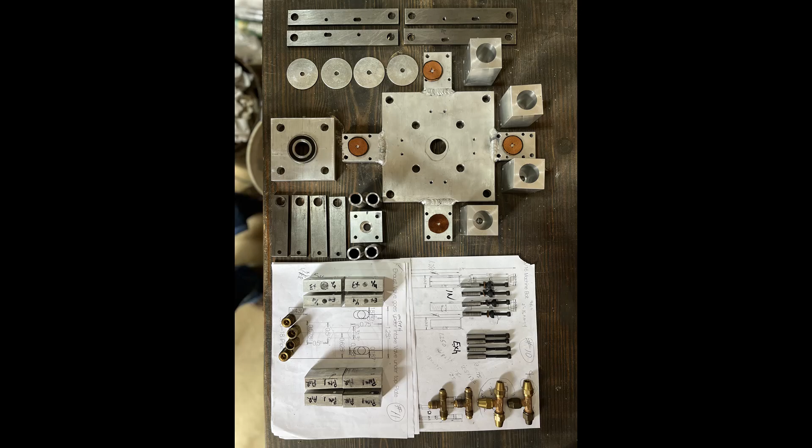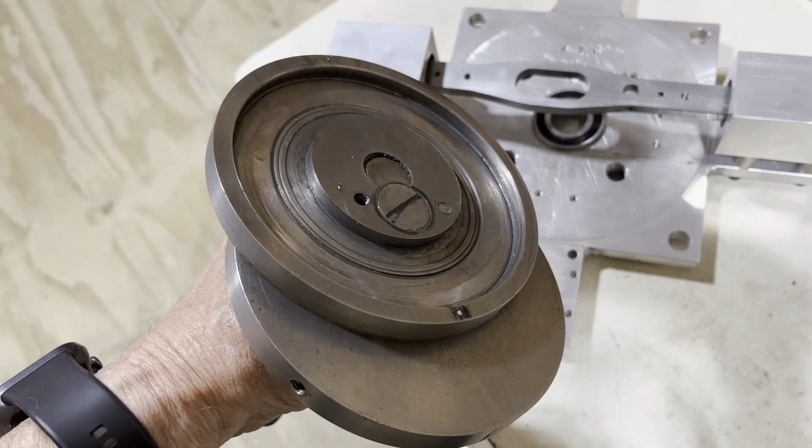The piston rod will slide in and out without any problem, and that seems to be very good. So I will need to put my eccentric in and check for the bearing ride that goes in the groove to make sure it works okay, and also that the drive shaft, when it's center drilled and the bearing goes in, lines up over the top of the hole and goes back and forth properly.

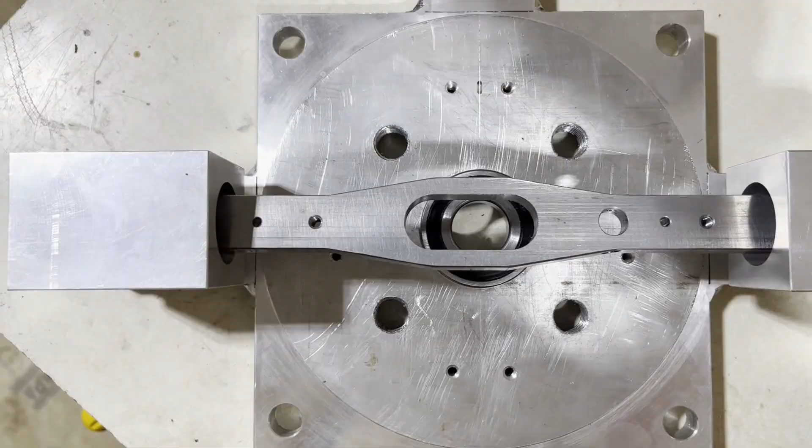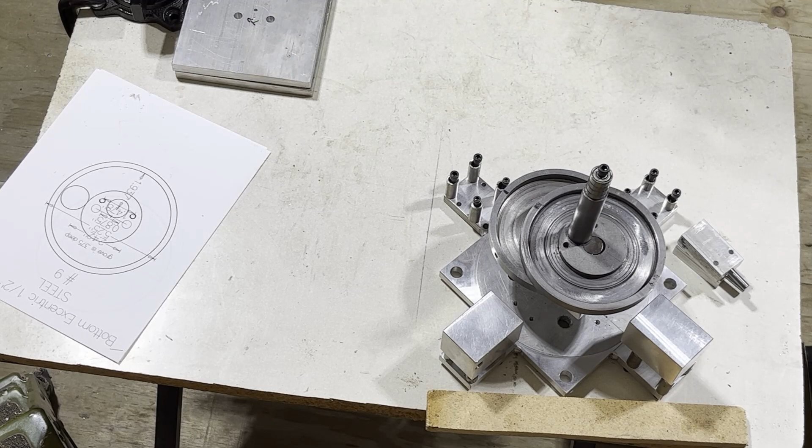What I'm doing is building a compressed air motor that can be put in a vehicle and used instead of a gasoline or diesel motor. I have most of the parts made. I've been working on it for a while, and yesterday...

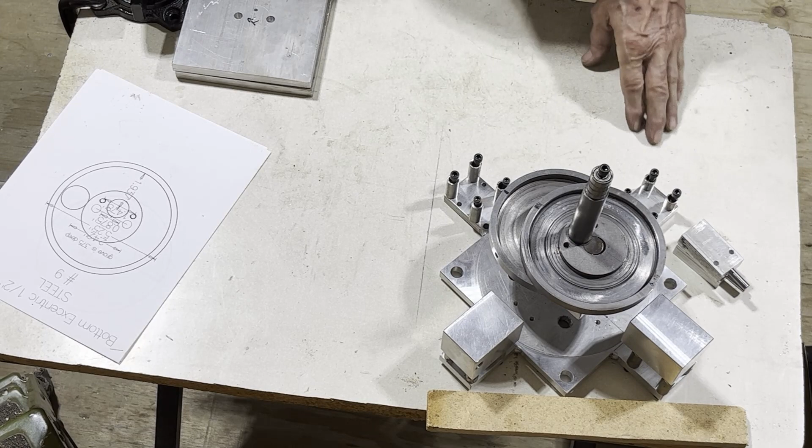I determined that I'm going to have to make new eccentrics, because the ones I have were made for a different engine, a prototype, and they're not quite the right size, and the offset is not right, so I can't use those.

So yesterday I went to a supply house and picked up a piece of aluminum, 6-inch by 12-inch. It cost me $29. I cut it into two 6-inch pieces that will be used to replace these.

I'm waiting on a turntable that will be used to make the circular ring, then offset and drill the hole. It hasn't come yet, and I'm waiting probably until tomorrow. It should be coming in. In the meantime, I was figuring out how to find the center and drill two holes so I can mount this down to the turntable, then rotate it to produce the groove that I need for the eccentric.

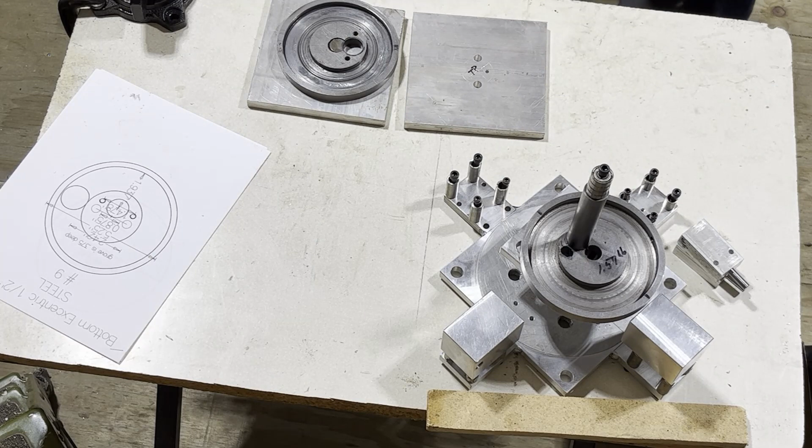Yesterday I had put all the cylinders on the base plate. Then I had to -- well, the reason I put the cylinders all on there and the push rods...

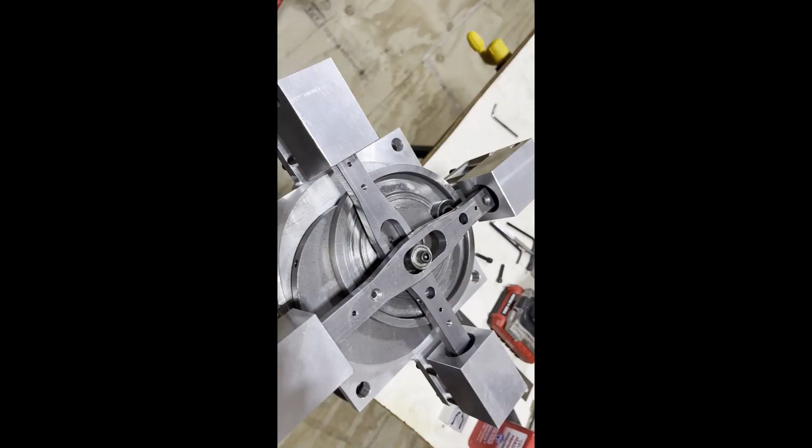In order to tell how much space I needed for these spacers underneath, I had to put everything on this base plate together with these under it so I could measure the clearance distance, both below and above, to determine how high I have to have the secondary plate in order to have the proper location.

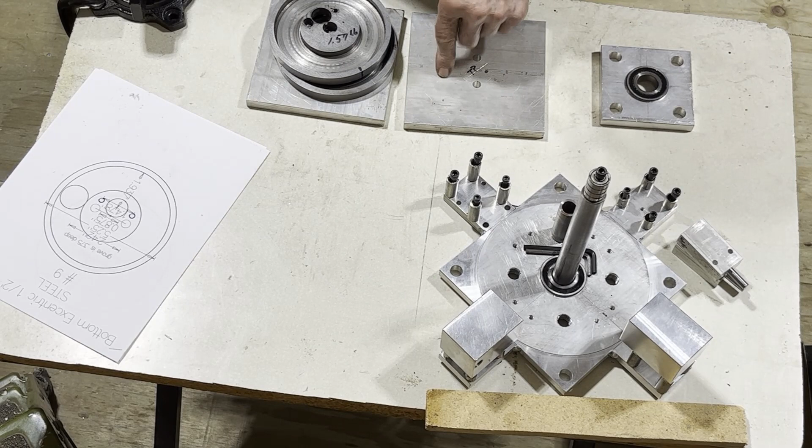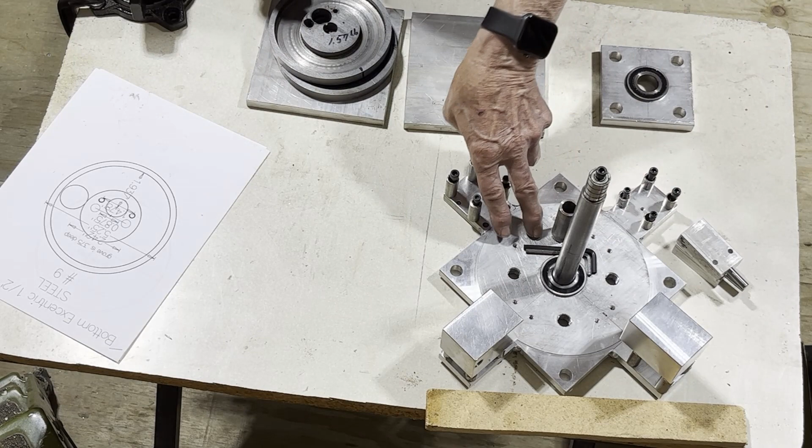Things are pretty slow because I'm waiting, like I said, on the rotary table. Once I get it, it'll be a couple of days before I work on these. Then I'll be able to assemble that base with the eccentrics, put this bearing to it, and start working on other areas such as where the valves are located. They will bolt to these two small holes underneath the plate. And then this would go upside down underneath the plate to give the engine two bearings, one up here and one underneath on the bottom.

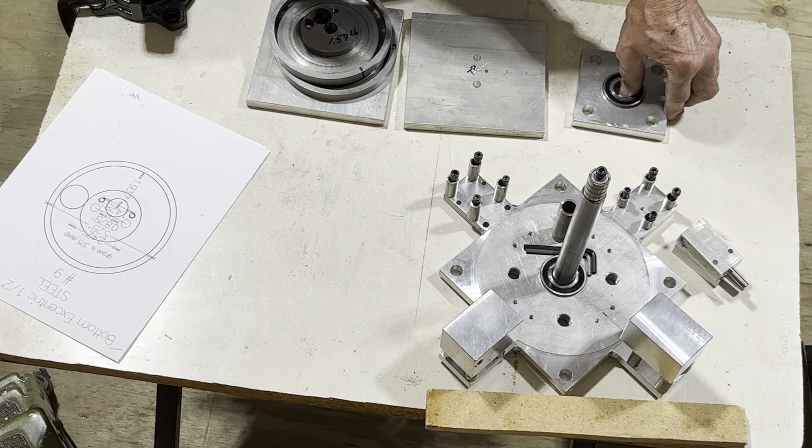All the bearings are sealed. The engine will not be using any lubrication. For the pistons, I have a high molecular weight plastic that is good for abrasion and friction, so I'll be using those for the pistons. There will not be any metal seals -- there will be a leather seal, like the kind that goes in a bicycle pump, if you've ever been familiar with one of those. Or back in the old days when you had to pump an old tire up with a hand pump when you had a flat. They work very well and don't require any lubrication.